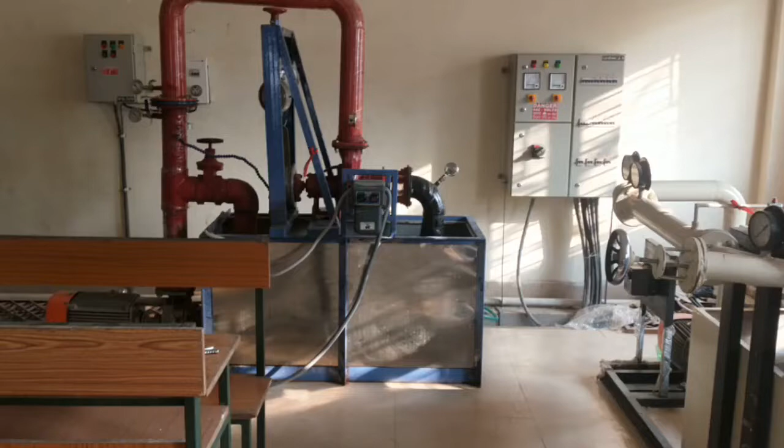So this is your Francis turbine machine setup, and this is very similar to your Pelton turbine machine setup also. Here is your water tank, or you can say in this case this is the tail race, and here is your bypass valve. Before starting off your experiment, keep this bypass valve fully open.

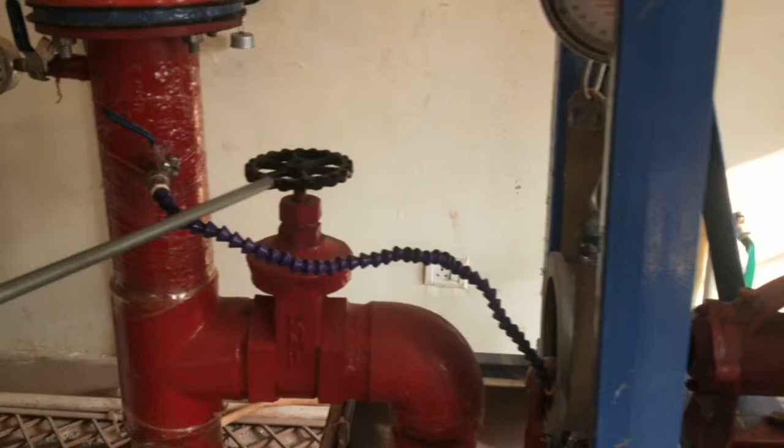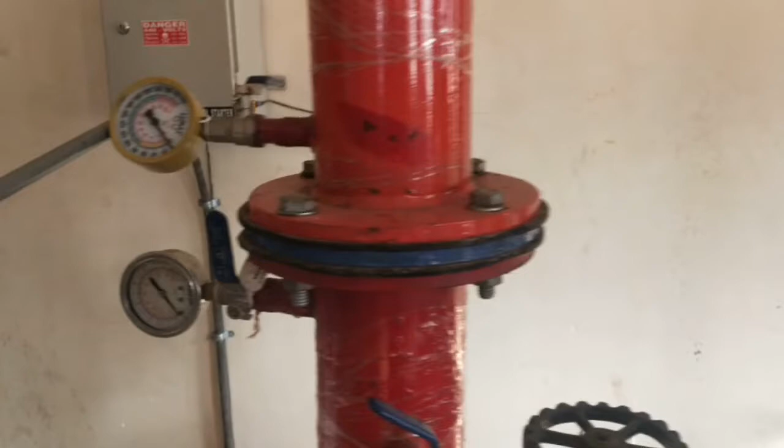This is your pressure gauge for measuring pressure head, and these pressure gauges P1 and P2 are installed at the inlet and outlet of the orifice meter. This is the orifice meter, and they are used to measure the discharge Q. These pressure gauge readings are in kg per centimeter square, so you have to convert it into meter by multiplying with 10.

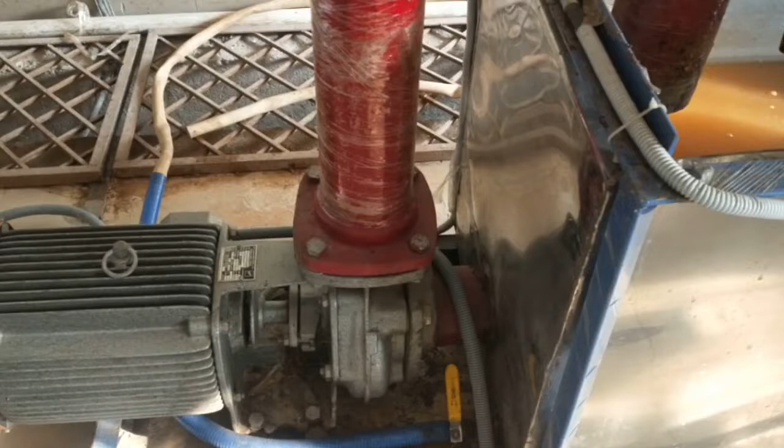When we start the pump, this is your pump, this is your centrifugal pump, and this pump is driven by this motor. When we start the pump, the water lifts off from the water tank through this pipe. By gradually closing this bypass valve, we allow maximum amount of water through this pipe, and this will generate the necessary pressure head.

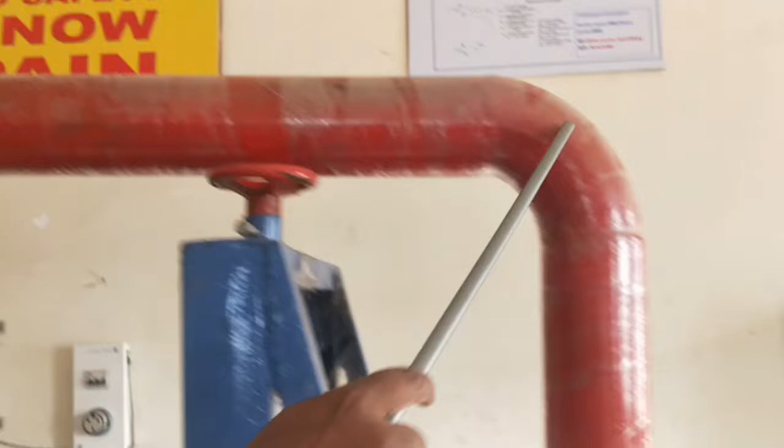Then the water flowing through this pipe enters the turbine casing. This is your turbine spiral casing, and the turbine is inside this spiral casing. You can see the turbine part from outside, but the turbine is actually inside this casing. This is your spiral casing.

The Francis turbine is installed inside this casing with the help of two flanges. This is one flange and this is another flange. The turbine is inside the spiral casing and in horizontal position.

The water enters through the penstock. This is your penstock. The water enters through this penstock to this spiral casing, and the guide vanes inside the spiral casing guide the water to the runner. Here the water enters the turbine radially, and exits from the turbine runner axially.

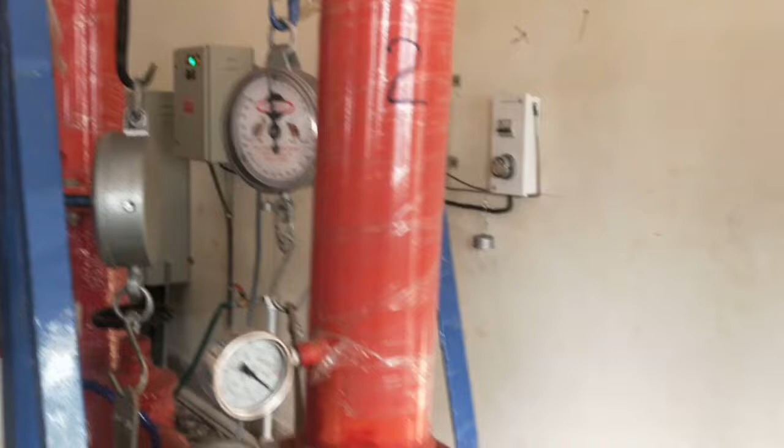So we call it a mixed flow type turbine, and the runner is submerged in water at all times when in working condition. The runner then rotates by both reaction force and impulse force. After striking the runner, the water leaves the runner axially and enters this draft tube. You can see the area of the draft tube gradually increases from this section to this section.

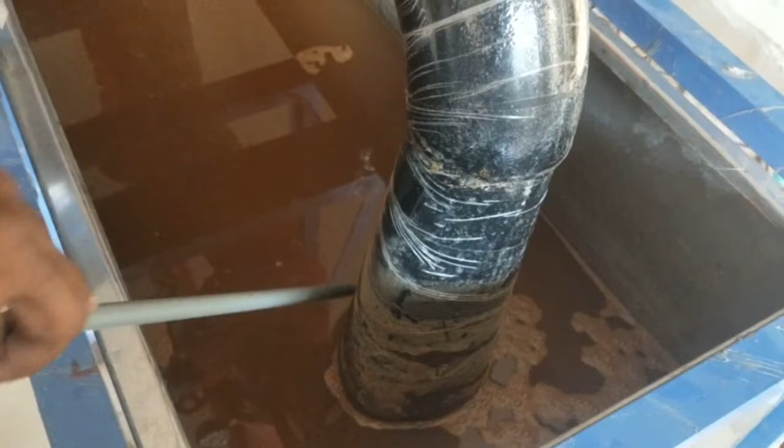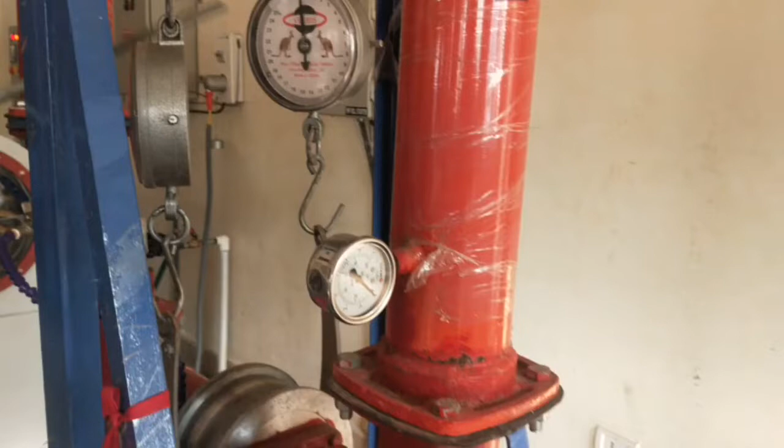And here is your load part. We apply the load through this spring balance. This will show your W1 value and this is your W2 value. And we use a tachometer to measure the RPM of the runner at this point.

So now we will start the machine and take different pressure readings, load and RPM readings. Start.

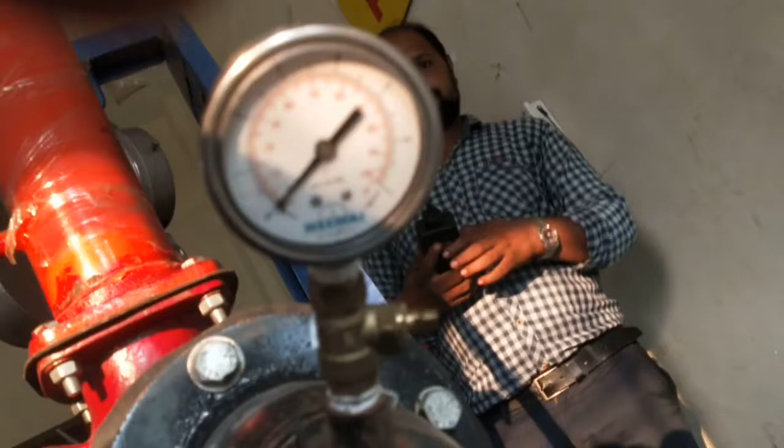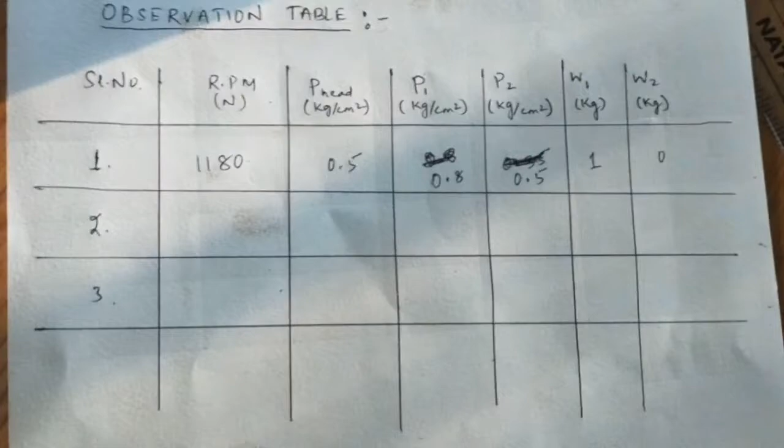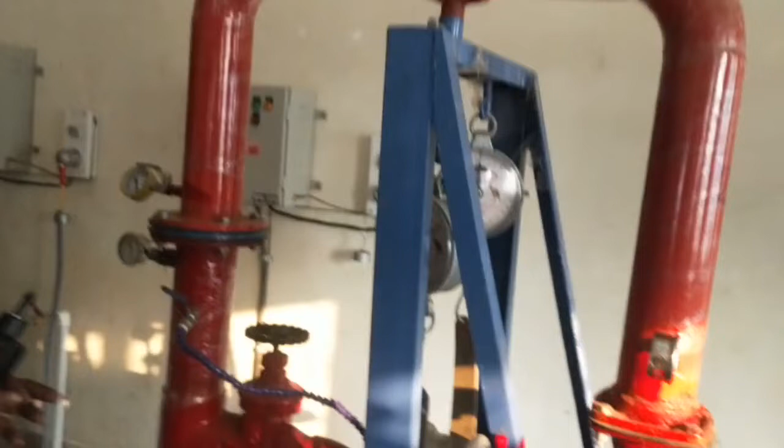वैल्यू चेंज करूँ कौन आरपीएम रो वैल्यू चेंज करेंगे, प्लस आपंकर प्रेशर हेड रो वैल्यूटा को चेंज कर। प्रेशर हेड रो वैल्यू बर्तमान बढ़ीगला सेकेंड रीडिंग पर। प्रेशर हेड रो वैल्यूटा आउ आरपीएम रो वैल्यूटा तुम बढ़े एटा हूँ, P1 और P2 रो वैल्यू।

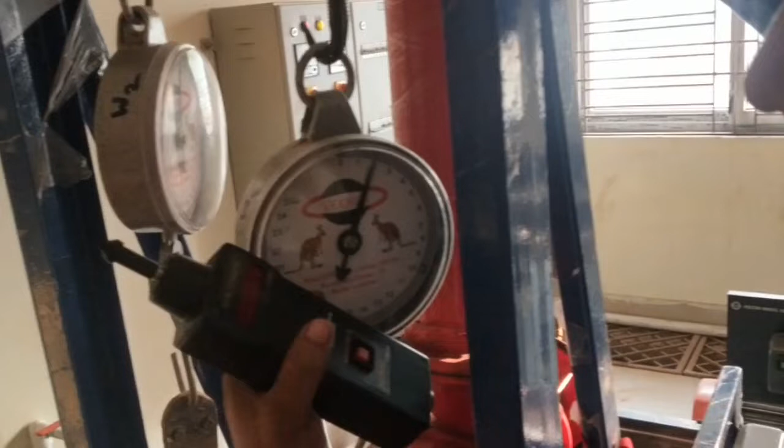तो लोड पकान 2 kg लोड कर दियो। बस। 2 kg लोड कल एवं तो रीडिंग गुड़ाक P1 P2 प्रेशर हेड आरपीएम।

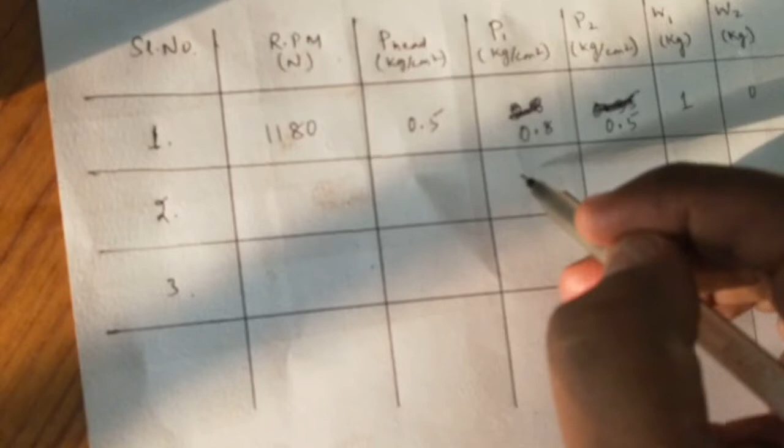P1 के 1.1, P2 के P2 0.6, प्रेशर हेड के 0.6

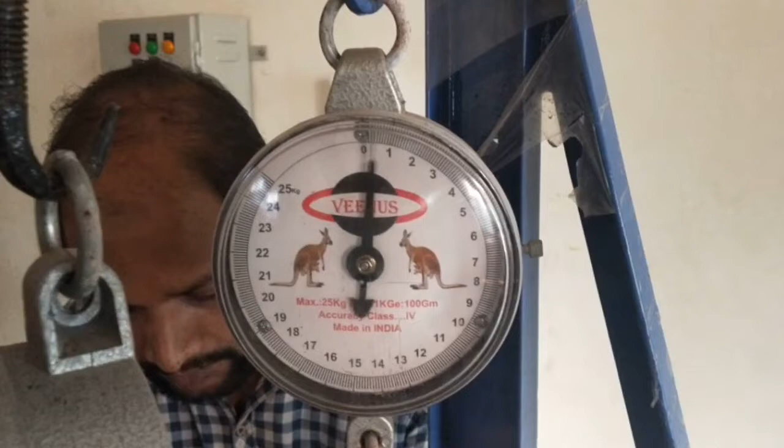2 kg लोड दिया है। W2 र value केते थिला, W2 fluctuate करुछि, सामान्य fluctuate करुछि 200 grams रे जो। W2 200 grams, ग्राम रे RPM 1380 ठीक अच्छे।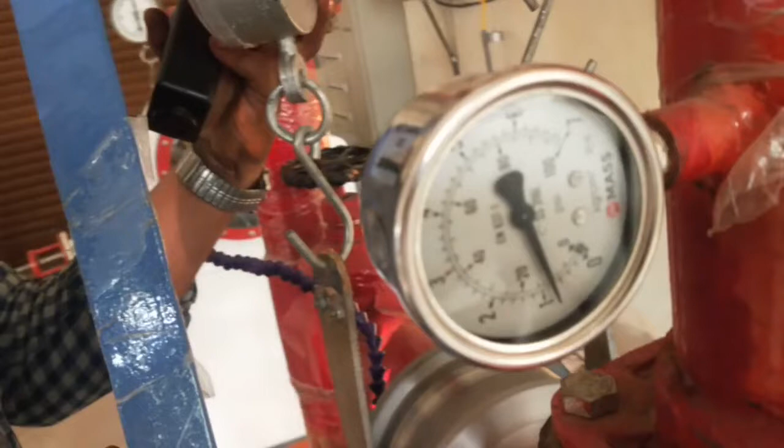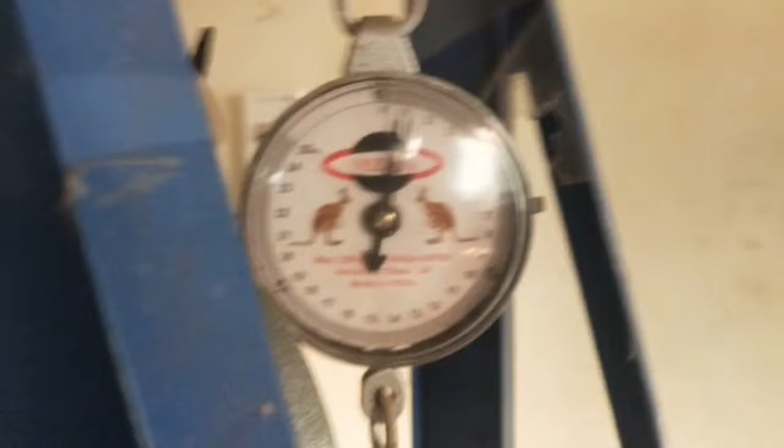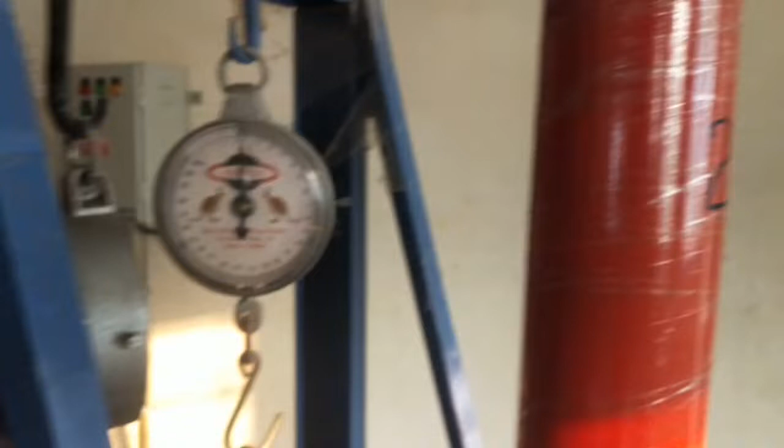एपटर 1 kg डिफरेन्स है, 2 kg हो लोड बढ़ाई दियो और सेटर रोड लोड टी रिलीज कर दियो, रिलीज कर बढ़ाई दियो। बस बस।

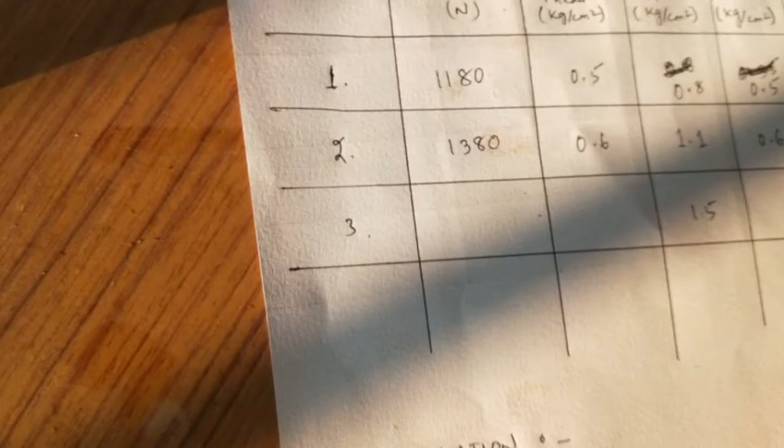P1 1.5, P2, और प्रेशर हेड दीटा वैल्यू को, प्रेशर हेडर वैल्यू को, प्रेशर हेडर वैल्यू को 0.9, प्रेशर हेडर वैल्यू

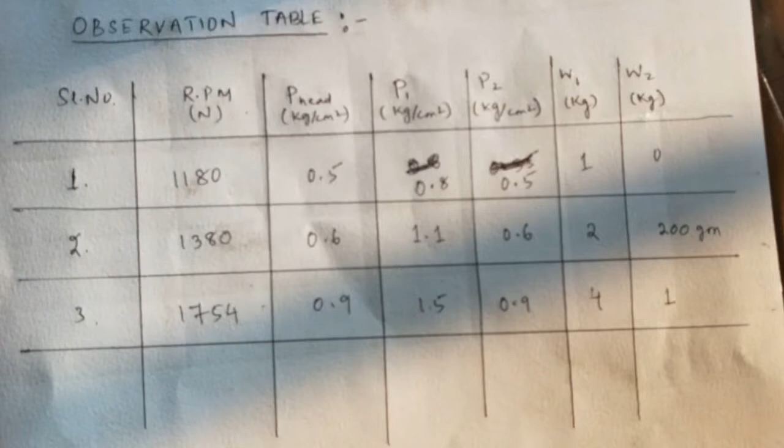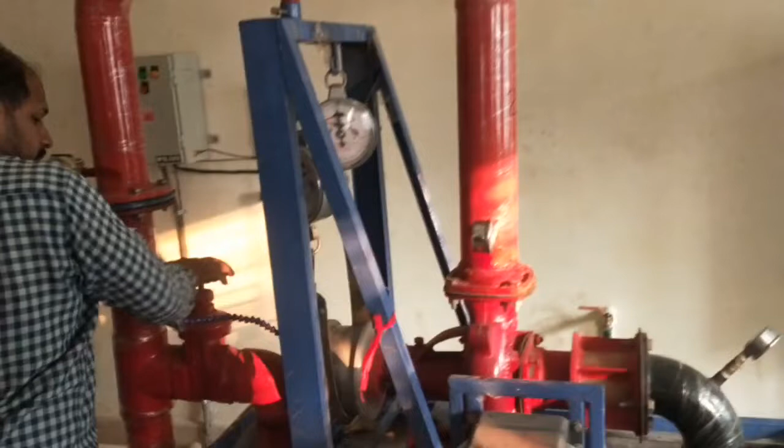ठीक है जब क्लोज कर दियो, बाईपास वाल्व को पूरा ओपन कर दियो, लोड पूरा खोल दियो। बंद कर दियो।

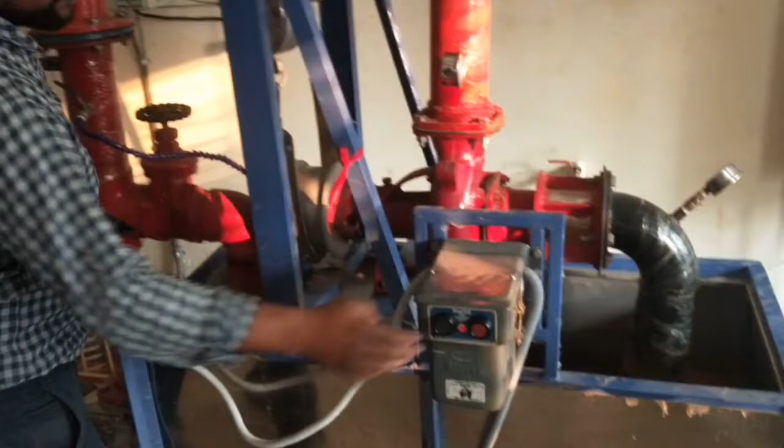So here is your calculation for first reading, for this reading. Here is your output power or shaft power: it is equal to the formula 2 pi N T by 60,000, in kilowatt.

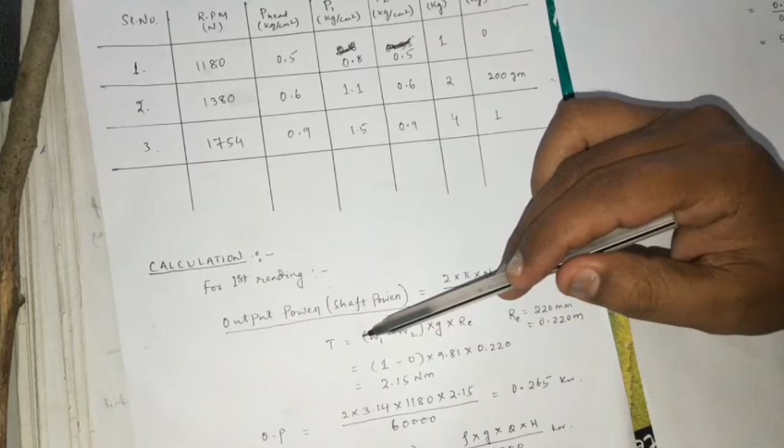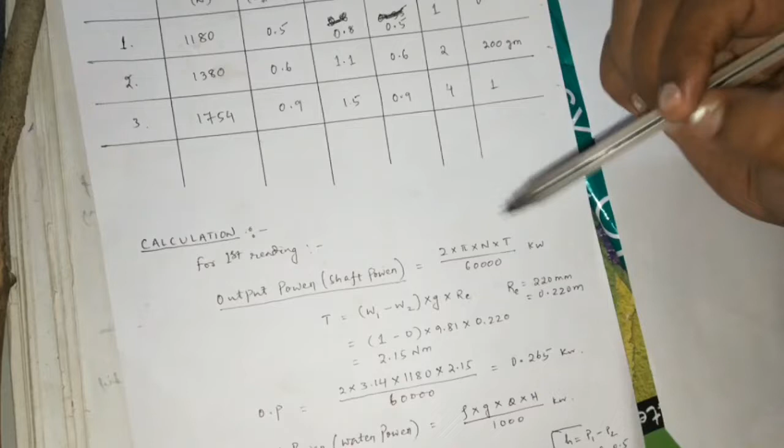And torque T is equal to W1 minus W2, load into g into Re, where Re is your equivalent radius, and it is given in your manual as 220 millimeter, and we convert this to meter: 0.220 meter.

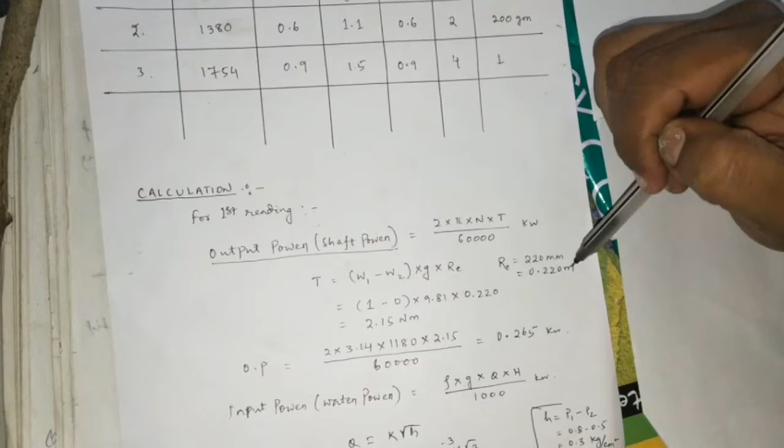So then T equal to: W1 is 1 kg, W2 is 0, g value 9.81, Re value 0.220. So torque is found out to be 2.15 Newton meter.

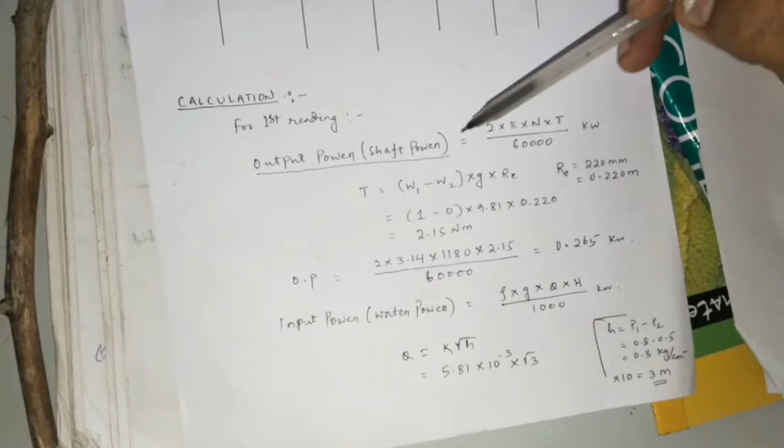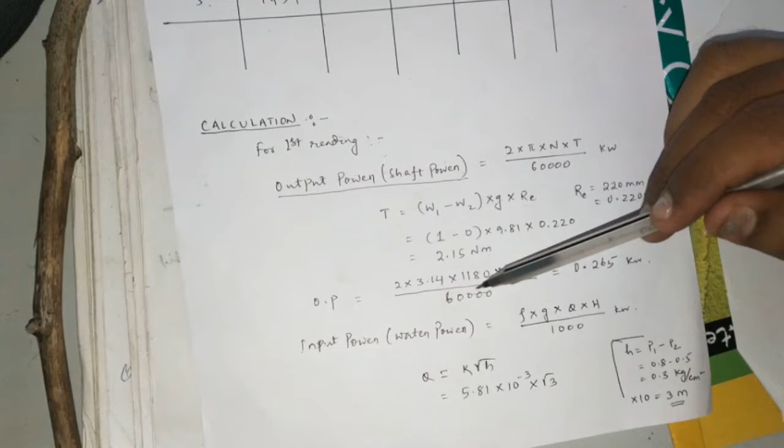Then your output power or shaft power, we put this formula and put the corresponding values: 2 into pi into N, 1180, T value 2.15, divided by 60,000, and this will come out as 0.265 kilowatt.

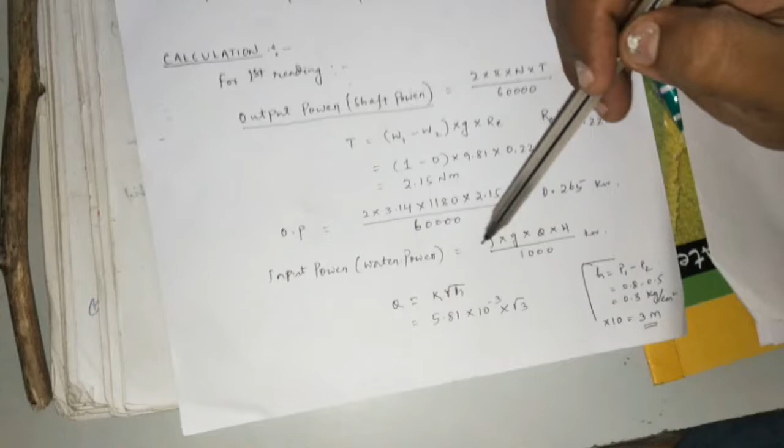Next, input power or your water power, the formula is rho into g into Q into H by 1000 kilowatt, and discharge Q equal to K into root over of H, equal to your P1 minus P2 pressure difference. 0.8 minus 0.5, P1 value 0.8 and P2 value 0.5. This comes out to be 0.3.

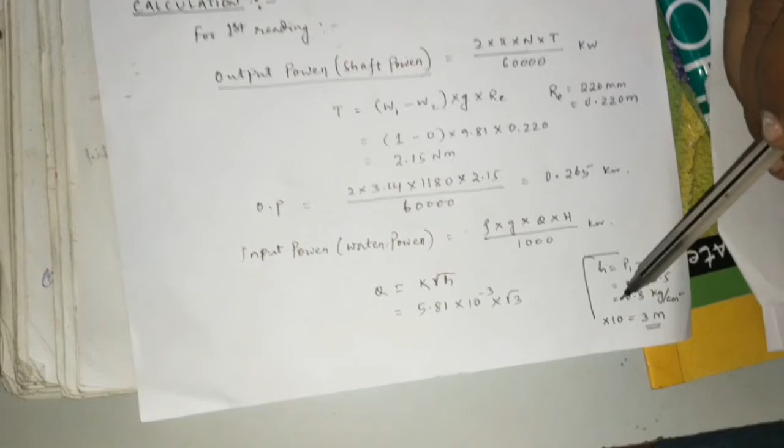It is in kg per centimeter square, and we multiply with 10 to convert it into meter. That is your 3 meter. H equal to 3 meter.

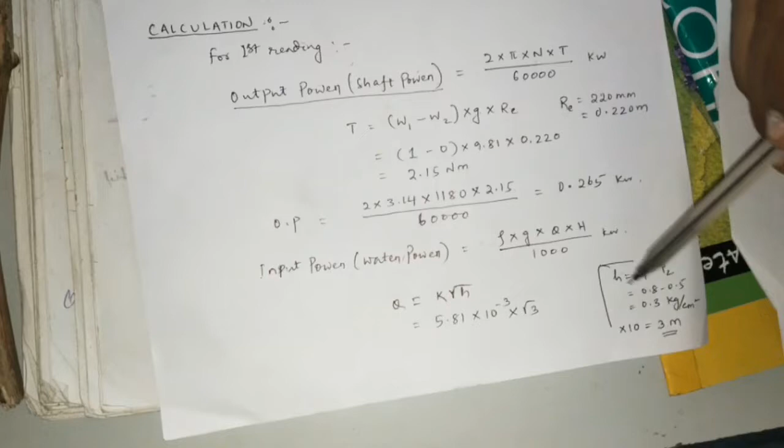Next, Q equal to 5.81 into 10 to the power minus 3, that is the K value, into root over of H, root over of 3.

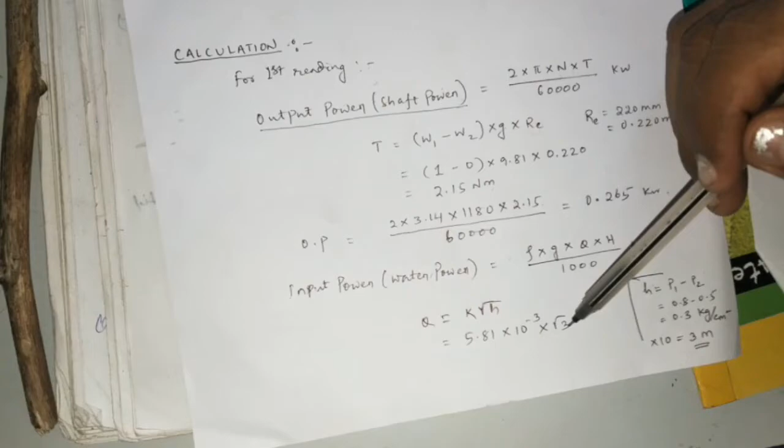Then input power is equal to rho for water equal to 1000, rho into g into Q, this much Q, into H, pressure head. Pressure head value from the table we know that this pressure head value is 0.5.

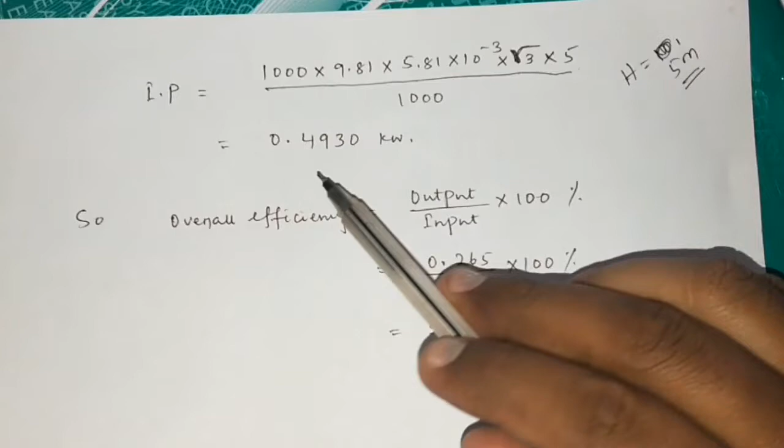It is in kg per centimeter square, so we convert it into meter by multiplying it with 10. So H comes out to be 5 meter. Next, input power is found out to be 0.4930 kilowatt.

So overall efficiency is equal to output power by input power into 100, and we got 53.75, the overall efficiency for first reading. Similarly, you calculate the overall efficiency for second reading and for third reading. You follow the similar procedure. Okay.